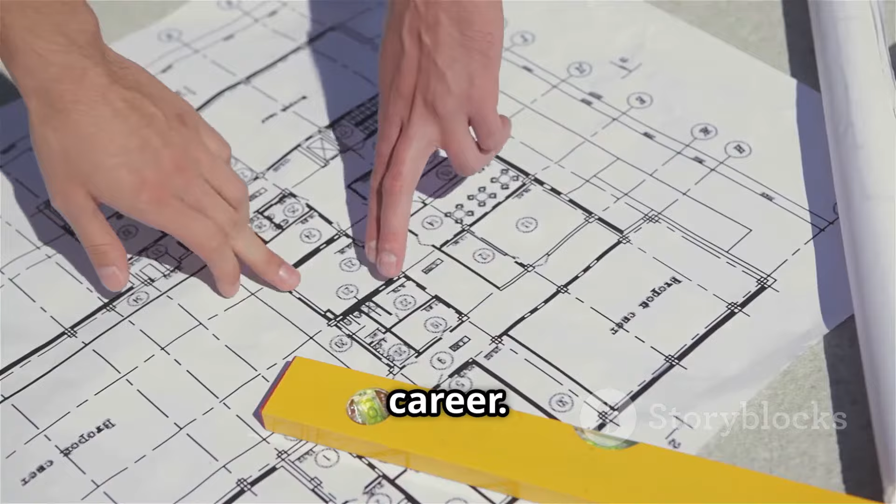We're going to look at the skills that companies are desperately searching for, the ones that will make your resume shine. And just as importantly, we're going to talk about the old school skills that are slowly being phased out. This isn't just about listing a bunch of software. This is about understanding the why behind these trends. It's about giving you a strategic roadmap to not just survive, but to absolutely thrive in your career. We're going to build a solid foundation for your future, piece by piece, so you can be the one designing the next generation of incredible structures. So grab your hard hat and let's get to work.

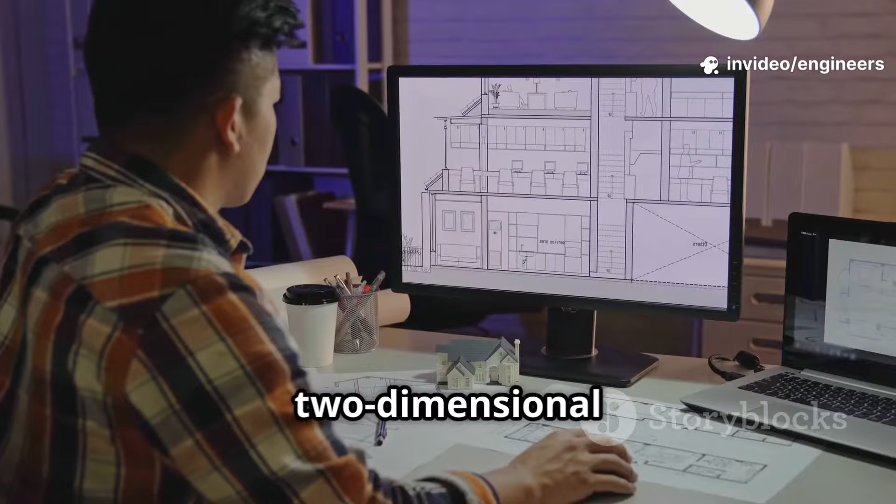Alright, first up, let's talk about the absolute game changer, Building Information Modeling, or BIM. If you think of traditional two-dimensional blueprints as a simple photograph, then BIM is like a fully interactive, data-rich, three-dimensional virtual reality model of the entire project. It's not just a pretty picture, it's a digital twin of the building before a single shovel hits the ground. Every single component, from a steel beam to a light switch, contains layers of information: its cost, its material, its installation schedule. This allows everyone, from the architect to the construction manager, to collaborate in one shared space, catching clashes and errors that would have cost millions to fix on site.

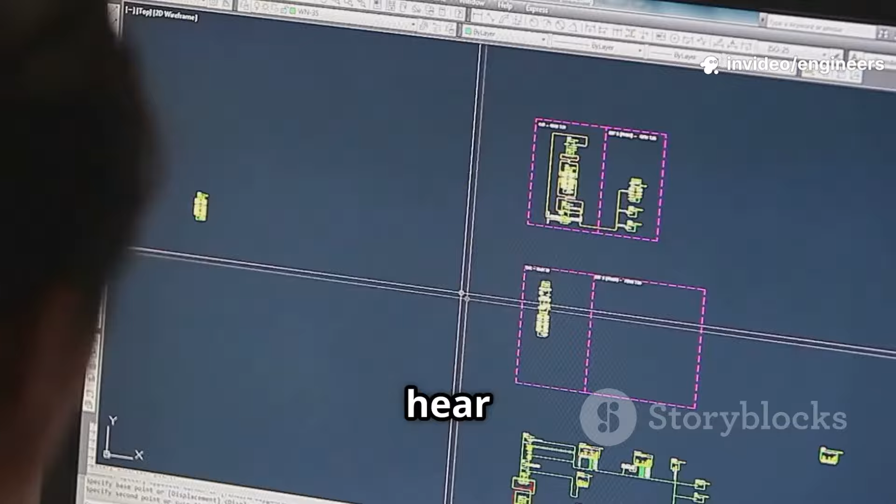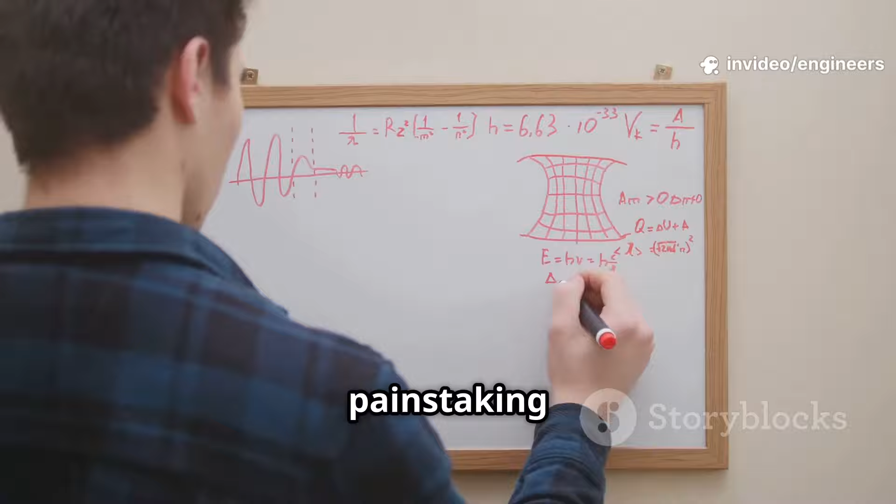As civil engineers, our number one job is to make sure things don't fall down. It's kind of our whole deal. And in the past, that involved a lot of painstaking manual calculations, safety factors, and maybe a few sleepless nights. But today, we have incredibly powerful software that lets us put our designs through the wringer digitally. We're talking about structural analysis and simulation software. This isn't just about checking if a beam can hold a certain weight. It's about simulating complex real-world forces like earthquakes, hurricane-force winds, or heavy traffic loads over decades. It allows us to optimize designs for both safety and cost efficiency in a way that was simply impossible before.

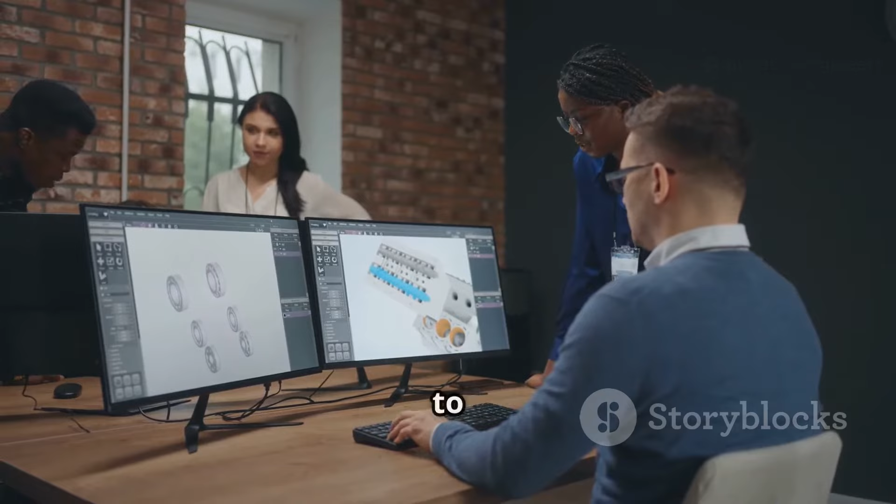The big names in this space that you absolutely need to know are tools like STAAD.Pro, ETABS, SAP2000, and SAFE. These are the workhorses of structural engineering. Major consulting firms and construction giants, think AECOM, Jacobs, L&T, live and breathe this software. They use it for everything from designing high-rise buildings and complex industrial plants to analyzing the structural integrity of bridges. Being proficient in one or more of these tools demonstrates a deep understanding of structural mechanics and an ability to deliver precise, reliable, and optimized engineering solutions. It's the difference between saying "I think this will hold" and saying "I have run 500 simulations and I know this will hold."

Civil engineering isn't just about individual structures. It's about how those structures fit into the larger world. And that's where Geographic Information Systems, or GIS, and remote sensing come in. Think of GIS as a smart map.

Instead of just showing roads and cities, it can layer on tons of other data: soil types, floodplains, population density, utility lines, and elevation contours. It allows us to analyze spatial relationships and make incredibly informed decisions. We can identify the optimal route for a new highway, pinpoint the best location for a new reservoir, or map out areas most at risk from landslides or flooding.

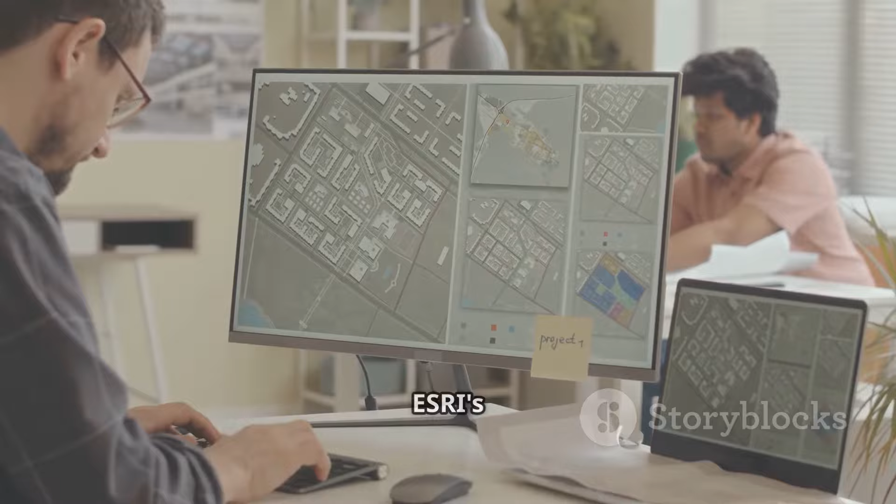This skill is in huge demand for urban planning, environmental engineering, and transportation projects. Remote sensing, which includes analyzing data from satellites and aerial imagery, takes this even further. We can monitor deforestation, track urban sprawl over time, or assess damage after a natural disaster without ever setting foot on the ground. The go-to software here is ESRI's ArcGIS, with QGIS being a powerful open-source alternative.

Mastering these tools means you can provide a macro-level perspective that is invaluable for large-scale infrastructure planning and disaster mitigation. It's about seeing the forest and the trees.

For a long time, the goal of construction was simple. Build it strong and build it cheap. But today, there's a critical third dimension. Build it sustainably. The construction industry is a massive consumer of resources and a huge contributor to carbon emissions. As a result, there's an enormous push for green building practices, and engineers with sustainability skills are no longer a niche, they're essential. This goes way beyond just adding a few solar panels to the roof.

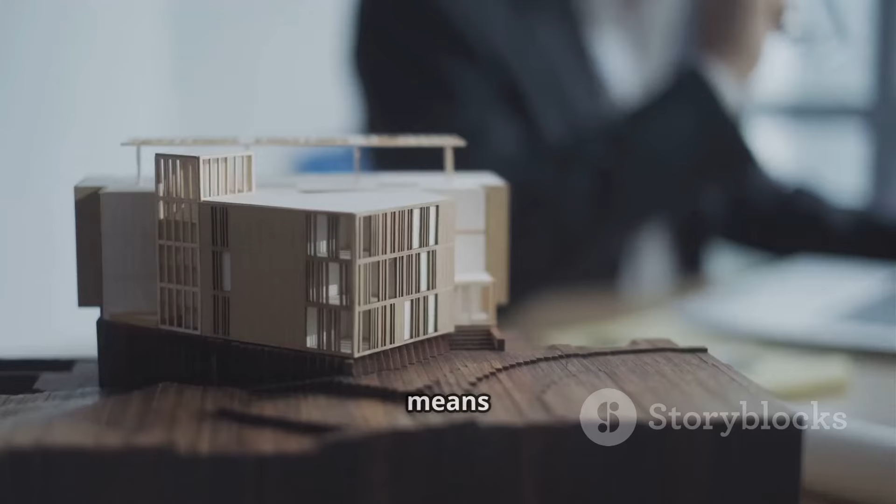It's about a holistic approach to design and construction that minimizes environmental impact over the entire life of a building. This means you need to be familiar with concepts like life cycle assessment, or LCA, which analyzes the environmental impact of a building from raw material extraction to demolition. It means understanding energy modeling to design hyper-efficient heating, cooling, and lighting systems. And it means being familiar with green building rating systems.

Certifications like IGBC-AP, which stands for Indian Green Building Council Accredited Professional, or the internationally recognized LEED Green Associate, are becoming massive resume boosters. They signal to employers that you understand the principles of sustainable design and can help them deliver projects that are not just good for the client's wallet, but also good for the planet.

You can have the most brilliant, innovative, and sustainable design in the world, but if you can't manage the project effectively, it will fail. It will go over budget, miss deadlines, and end in chaos. That's why project management skills are, and always will be, a cornerstone of civil engineering. This isn't just about creating a to-do list. It's the science of orchestrating 1,000 moving parts, people, materials, equipment, and money, to achieve a specific goal on a specific timeline. It's about risk assessment, resource allocation, and clear communication among dozens of stakeholders.

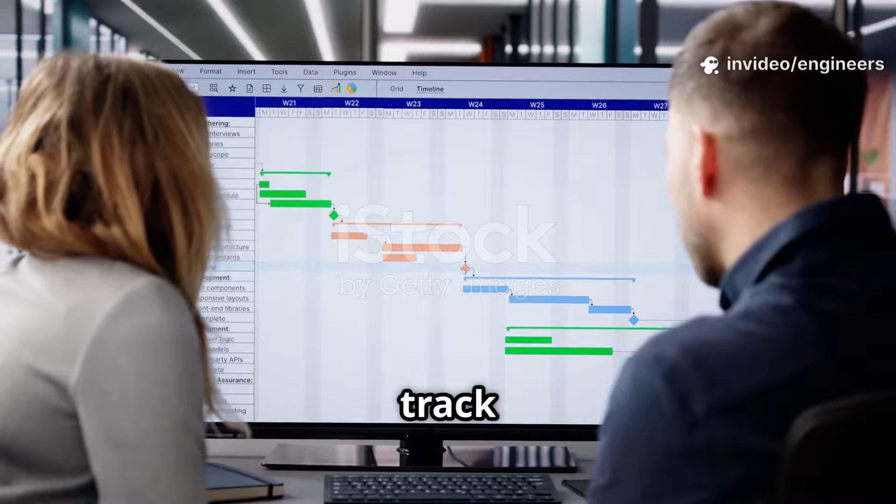To do this effectively in the modern era, you need to be a wizard with project management software. The two titans in this arena are Microsoft Project and Oracle's Primavera P6. These tools allow you to create detailed work breakdown structures, track progress in real time, manage resources, and forecast potential delays before they become catastrophic.

Earning a certification like the Project Management Professional, or PMP, is the gold standard. It's a rigorous process, but it tells the world that you have the proven experience and knowledge to lead complex projects from conception to completion successfully. In engineering, the person who can manage the timeline and the budget is often just as valuable as the person who designed the structure itself.

For over a century, land surveying meant trekking through rugged terrain with tripods, theodolites, and leveling staffs. It was slow, labor-intensive, and sometimes dangerous work.